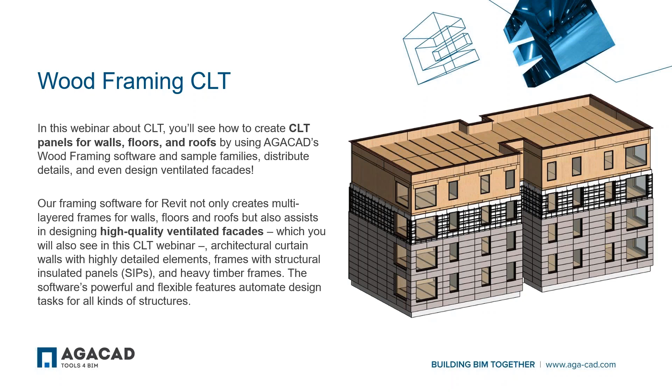Our framing software for Revit is not only for multi-layer timber frames, but it can also design high-quality ventilated facades, also architectural curtain walls, frames with structural insulated panels, and even heavy timber framing. So everything depends on the configuration and on the families that we're distributing. The software is really flexible.

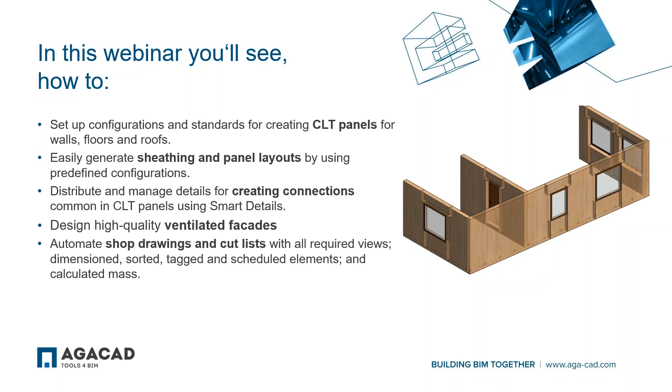So in this webinar, you'll see how to set up configurations and standards for creating CLT panels for walls, floors, and roofs, also easily generate sheathing and panel layouts, distribute and manage details for creating connections, also design high-quality ventilated facades, and automate shop drawings and cut lists.

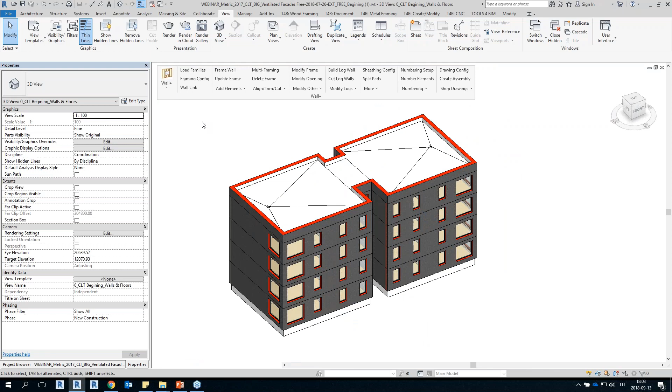And as you can see, this is just a simple project modeled with standard Revit walls, roofs and floors and windows and so on. So before using our software, we have to have a model created in Revit. Then, using our software, we load all the families or all the structural framing elements and structural connection elements to our project that will be used in designing CLT panels.

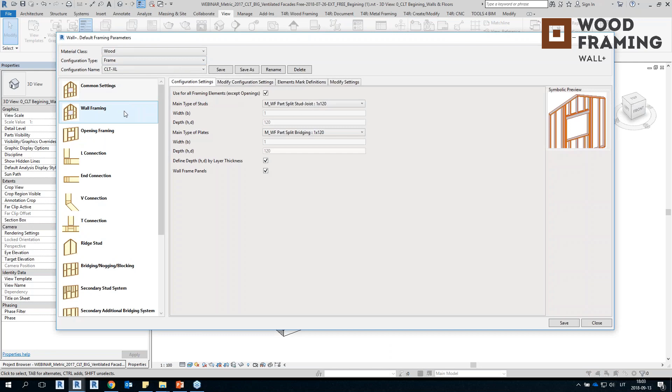And then we create configurations, so rules, how the elements are distributed into our walls. In these rules, we can predefine what kind of elements do we want to distribute, how openings are framed, how connections are framed, or how the parts are split.

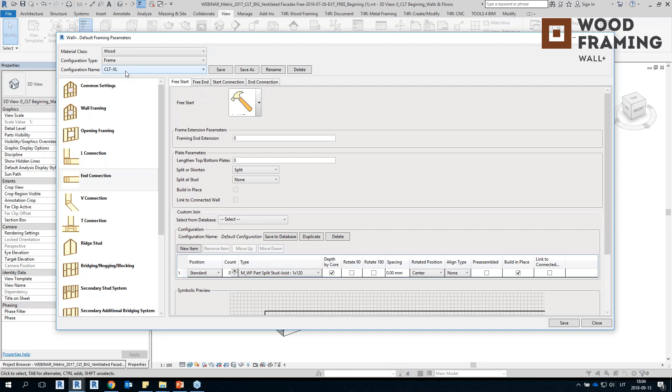And then we save these configurations using our own name so that later they can be used on future projects. They can even be saved on a shared location, like on your company's server, so all of your colleagues would have access to them, and all of them can use them. So, as I mentioned, they can be created only one time and then used in the future.

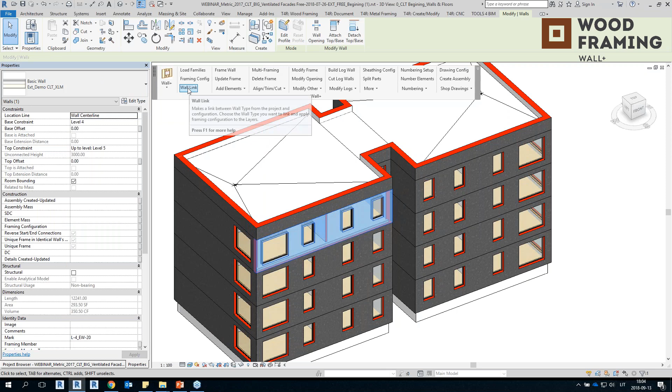And then when we create those configurations, we create a wall link. So, as I mentioned, this is just a simple wall created in Revit, and you can see that I have all these layers created. And now I have a window that is called a wall link. And when I open it, you can see that I have right here the wall structure that is created in Revit. So I have 6 layers, and to each of those layers, I can map a specific configuration.

So right now to the structure layer, I'm saying that I want to add the main frame, so the main CLT panel layer. This is the configuration that I created right here, and I mapped it. And also I can create configurations for the parts. So the CLT panels and the insulation on top of them, and then the facade panels on top of insulation. All of them will be created as parts in Revit. So you'll see that.

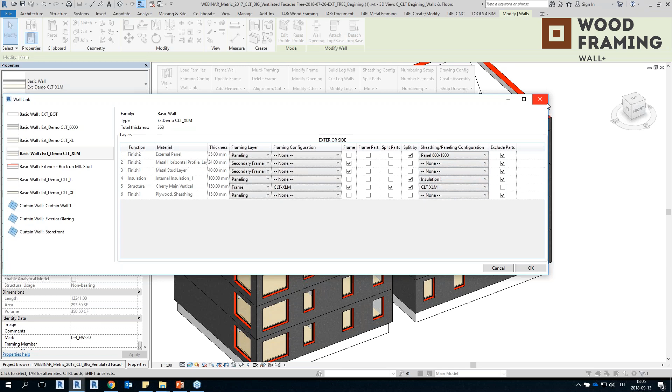Okay, and now I will open another view. And in this view, you can see that I've already generated CLT panels on half of the building. So you can see that on this part, I already have parts generated. So all of these CLT panels are created as parts, but I don't have them yet on this side of the building. So during the presentation, that is what you're going to see.

I will finish the building by creating CLT panels on this side of the building and on whole floors and roofs and so on. So right now, big CLT panels are generated on this side of the building, and on this one, I will generate them by different configurations so you could see some variety.

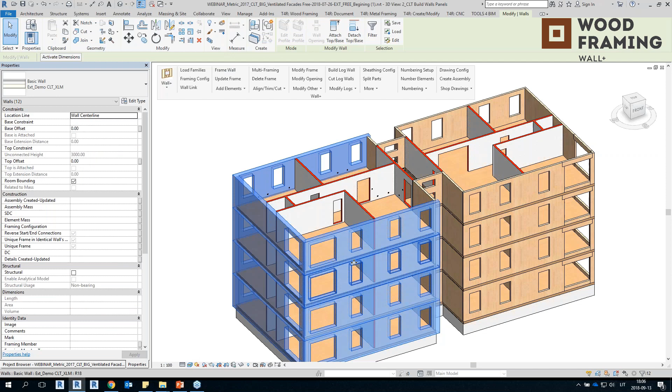So let's go ahead. I will select all of the walls in this view. I will click on frame wall, and now the tool is creating frames and parts for 12 walls in this project. So you can see that it's starting to work, and you can see instantly that CLT panels are much smaller. On this side of the building, as I mentioned, I'm using a different configuration.

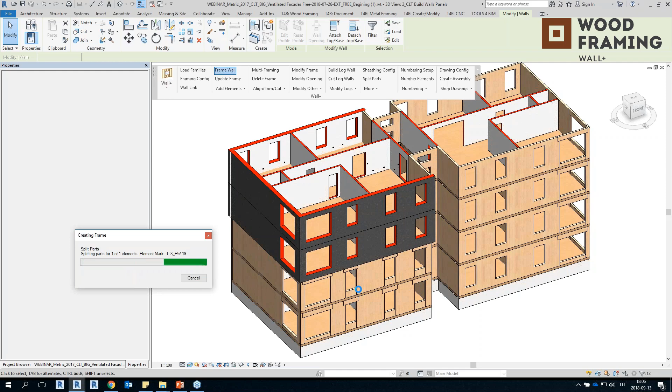And that's it. I already have the parts split, but of course the connections are still left, so we'll add connections later. And now I will open the Manage Walls window, because using this I can very easily select all interior walls.

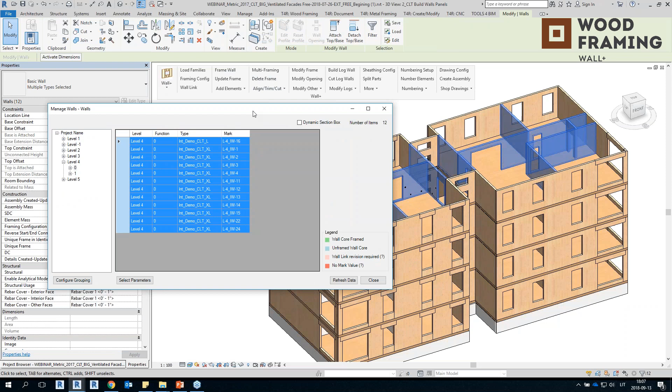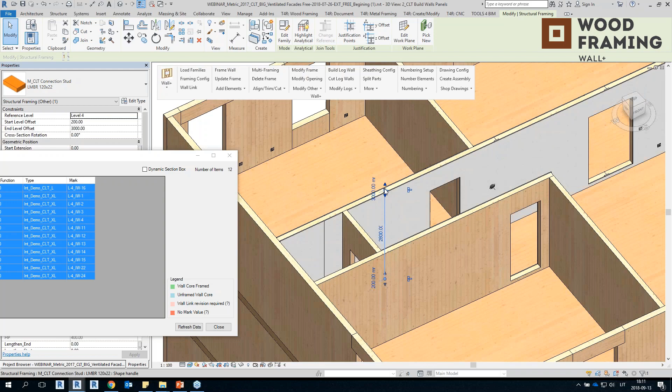You can see that I can filter them out like this for one floor, and then I can hit frame wall again like this, and this wall is created with the sheeting, and the connection is really detailed, as you can see straight away. Okay, and finally we can move on.

So I will open another view for the parapet, and I will select all of it and frame it again. So for the parapet, I turned on the insulation parts. What you can see in this view instantly is that for the side of the building that I finished before the webinar started, I have split the insulation parts, and I've not done that for this side of the building because I just want to save our time.

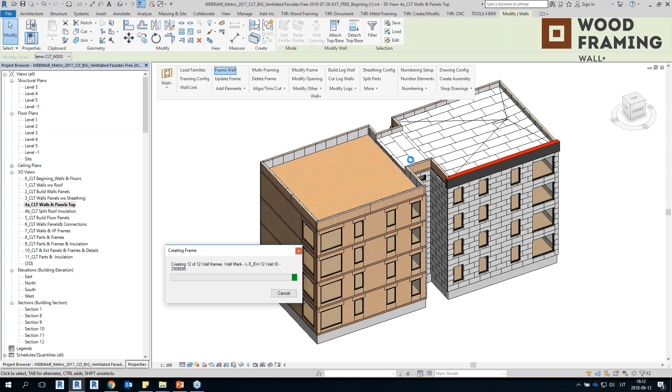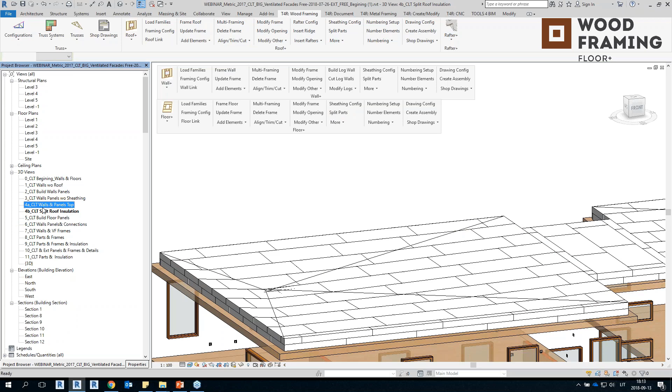But for the parapet, I also split the parts for the insulation as well. So the CLT panels are created every 6 meters, and also the insulation parts are split for the parapet. Yes, and you can see how nice it looks. And now I can go to the view, okay, and I can select it. And now what I'm going to do is I'm going to split the insulation parts for this roof. Okay, and it's done. So you can see that it's starting to come together.

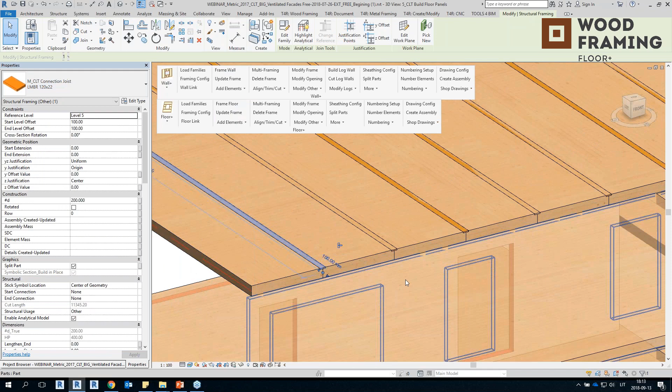And now I will move on to the floors. So with the floors, it's a little more interesting because we're going to modify the frame, and we're also going to check the multi-framing functionality. So I'm going to select this floor and I'm going to frame it. So the workflow is the same. We already have the floors created in Revit. Now we're framing it, and the tool added these connection joists, and it split the parts again for the CLT panels.

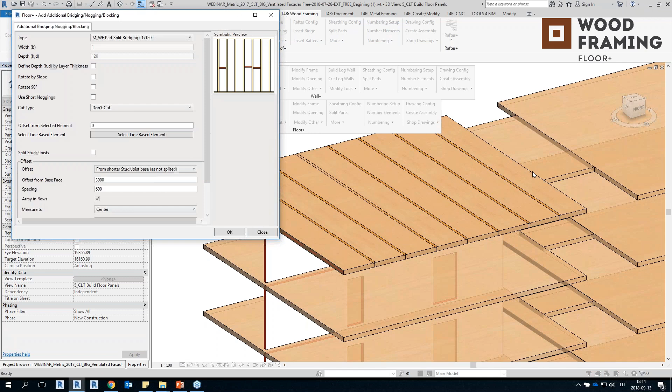But these panels are too long for me, so I want to add an additional element, a split above this wall right here. So this wall will act as a support. I'm gonna use the add additional elements functionality from the Floor Plus, and I'm gonna add an additional bridging between these invisible elements that were added in the configuration. I'm gonna split the joist with this element, and I'm gonna select the wall to act as a support. And that's it, and now the tool will add the additional element.

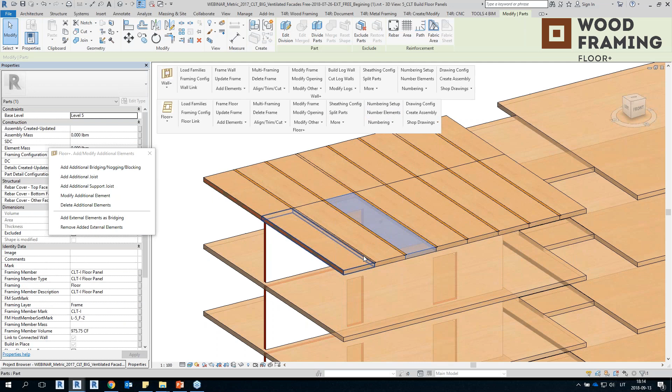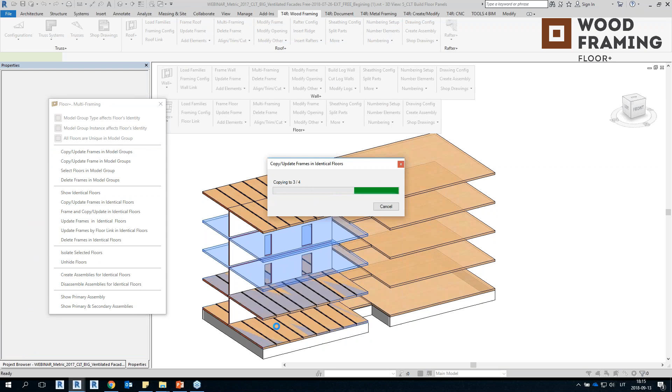And now I just have to click on split parts, select the element from the frame, and that's it. The parts are split and the frames are also split. And now I don't even have to do all of this workflow again for each floor because they are identical. So I'm going to open multi-framing, and I'm going to copy this frame with all CLT panels to all identical floors in my model. And that's it. So I won't have to modify each floor. I can just copy it like this. So it's pretty fast, as you can see.

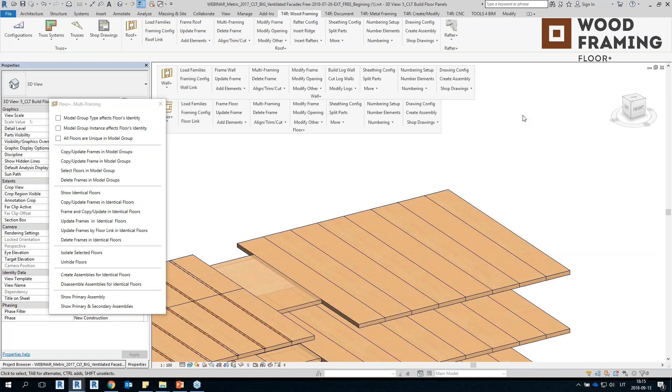And also what I can do is I can frame these floors, and they use a different configuration. So I'm gonna just use frame and copy. Yeah, and that's it. And now what's left is the details for this floor, but I will add them later so you'll see. And now you can also see the connection that is really detailed.

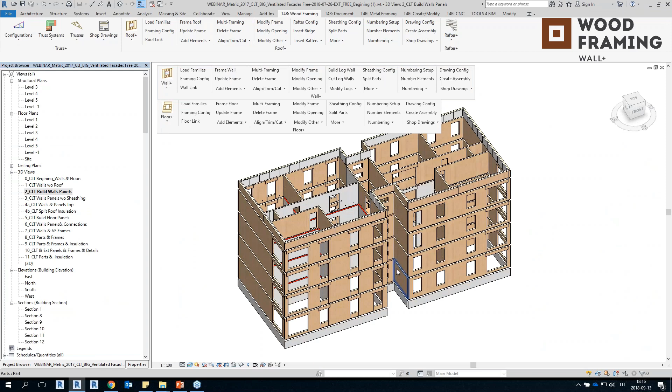Before I add the details, I have to number the parts, and the tool numbers them automatically. So I just need to use number parts and then number elements. So the tool is writing mark parameter values and values to other parameters that you choose to your elements and to your parts, to your structural framing elements and structural connection elements automatically.

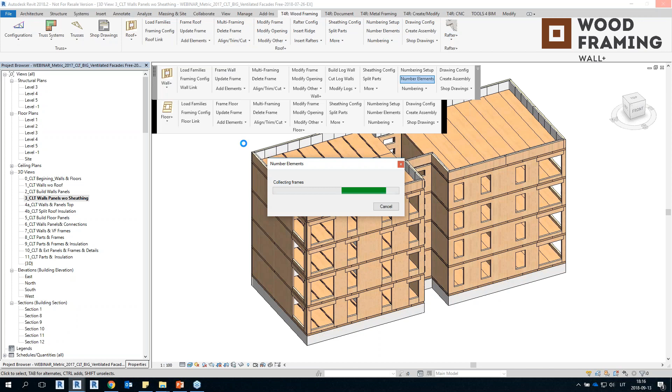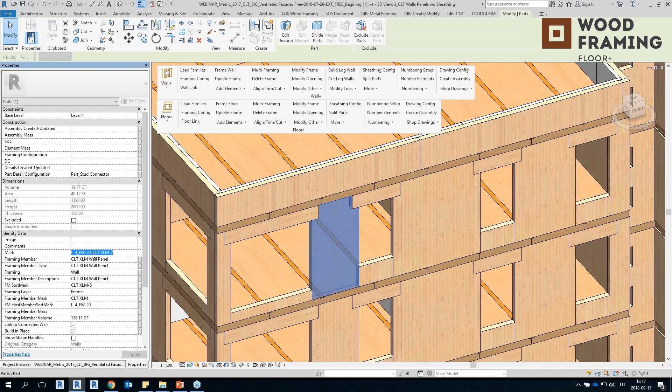Yes, so all of that is numbered, and I can do also the same for the floor parts. And now I can select the parts, so you could see that all of that is numbered automatically. And we will also see these values added in the shop drawings.

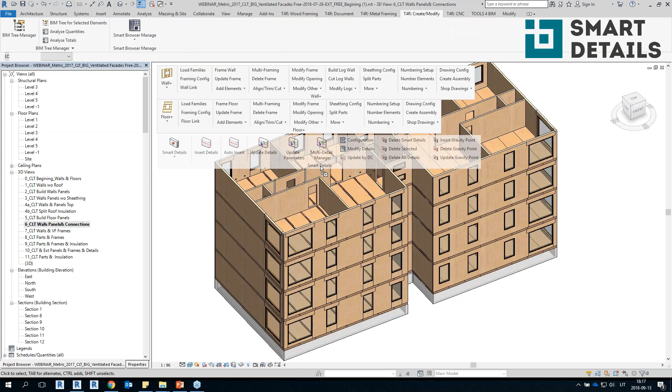So once I've numbered them, I will open another 3D view for connections, for adding details. And for this, I will take my Smart Details tool, another tool that I will use to add the details. So first of all, I will select all the headers in my model.

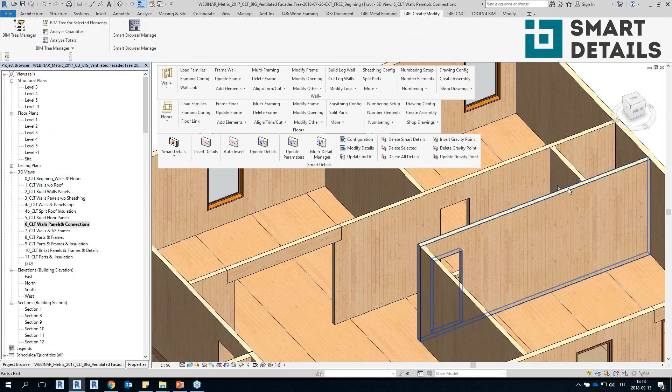And I will use Insert Details, Structural Framing, Header, Dovetails, Insert Details. So now the tool is inserting details automatically to 44 elements in my project. It's searching for the rules that I've added in the configuration and so on. And you can see that they're here. The details are added on all elements in my project, to all headers that I've selected.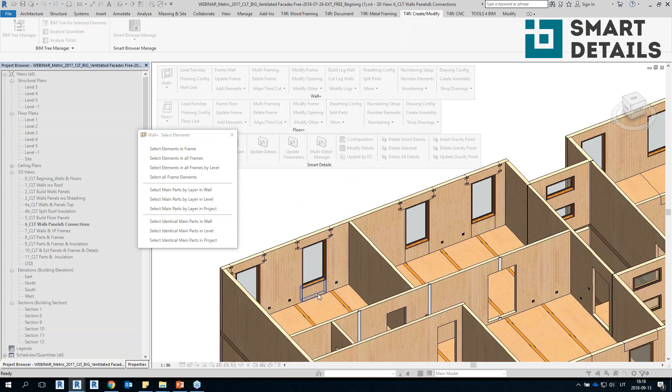And now what I'm gonna do is I'm gonna select the parts. So for that, I will open Select Elements menu and use Select Identical Main Parts in Project, let's say. Select this part. All identical parts are selected, as you can see, very quickly. And now again, I'm gonna use Insert Details, choose the CLT parts category and add dovetail assemblies. It's just an example with a dovetail, but any type of detail can be added.

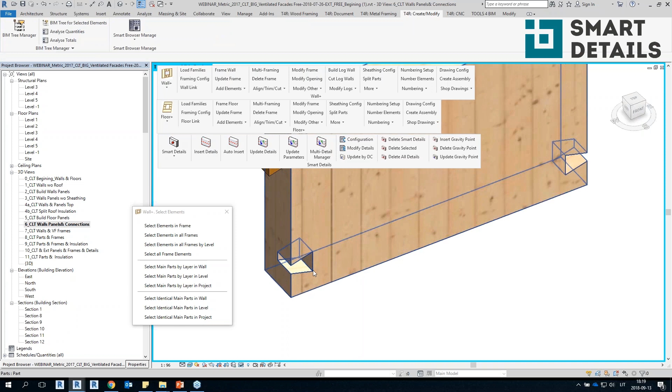So I will just isolate this part and this detail so you could see how accurate this is. Isolate element, and you can see that the cuts are added right here, and the structural connection detail is also added right here. So it looks really good in my opinion, this detail. Yeah, and it's added, it's distributed everywhere. So as I mentioned, any type of detail can be added.

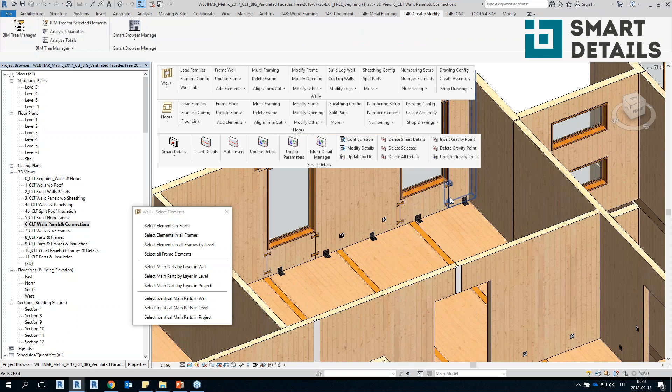So now I will select the main parts in level only. So not identical, but these ones. And again, I'm gonna insert details, choose the CLT parts and angles. Yes, and angles are distributed throughout the walls. I can also do the same for this side of the building, like this.

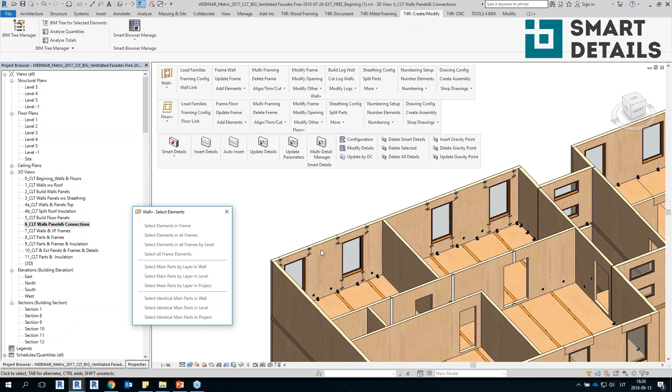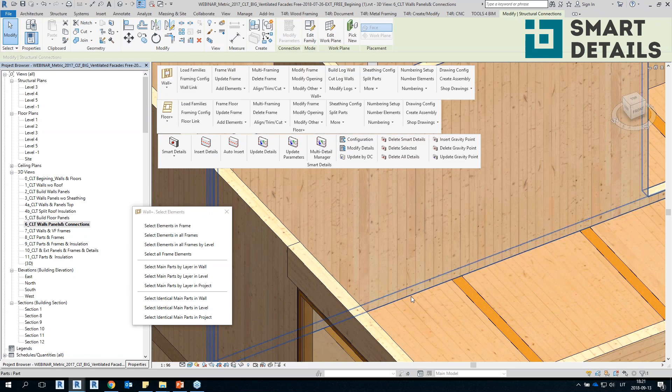And now what I can do is I can add connection dovetails. So I'm gonna select the main parts by layer in level. Yes, and I will insert the details to the connections. So connection dovetails, it added these details to the connections that it found. So this is a T connection, and we can see that this is an L connection, and also all of the details are added.

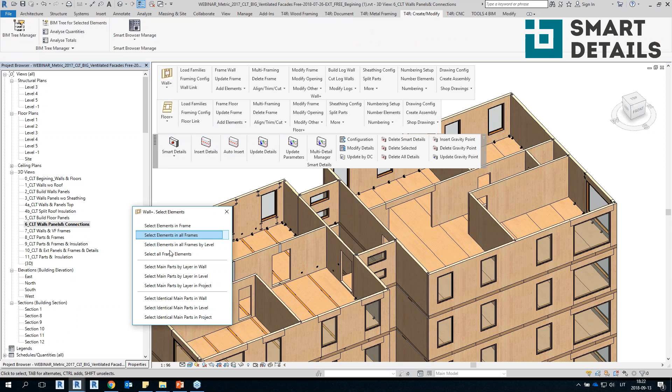And now I can select walls in the side of the building, and again add the connection dovetails. Yes, and finally the interior walls. Yes, and the final wall is left. This was a little different.

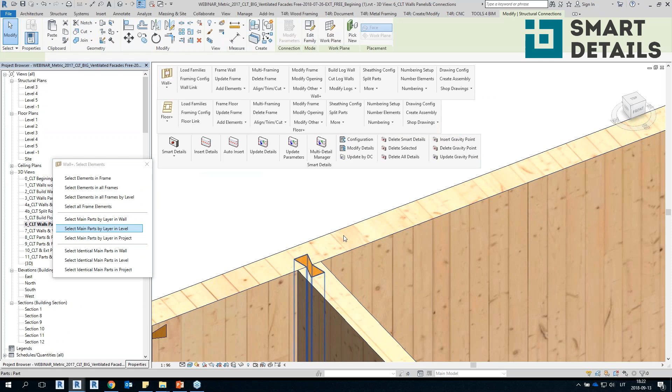Yes, and now that I've added all connection dovetails, for example, we can even isolate this wall again to see how it's added. Yes, so everything is really accurate. I will reset this view.

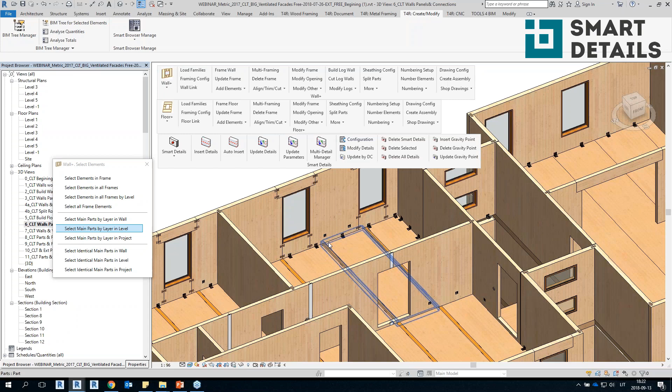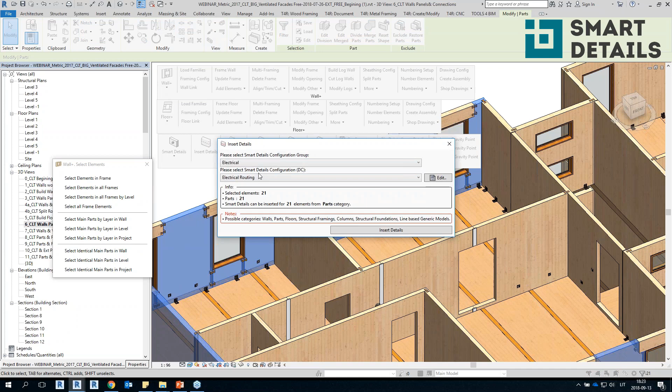And now let's add details for electrical fixtures. So you may notice already that I have electrical fixtures in my model, and I can add details even for these kind of elements. So I will again select these walls, insert the details, choose another group for electrical fixtures and electrical routing configuration. And that's it. You can see that Smart Details added a cut for these electrical fixture elements.

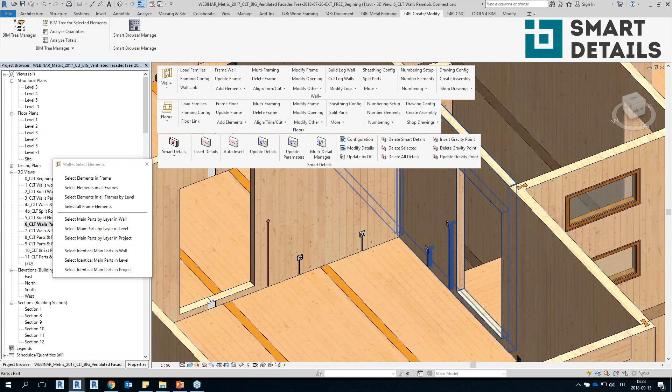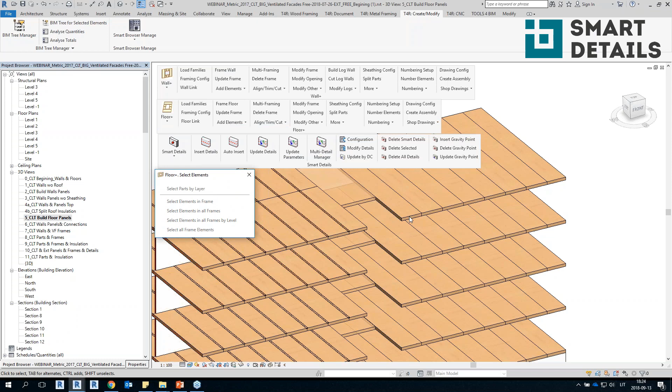We can also add these details in the interior walls. Okay, insert. Yeah, and that's it. And now I can go back to this 3D view created for the floors, and I can add details for this side of the building, for these floors. So I will open Select Elements menu of my floor tool, select parts by the layer. I will do this only for the top floor, and I will insert the details to this floor. I will choose CLT floor parts and CLT floor connection dovetails.

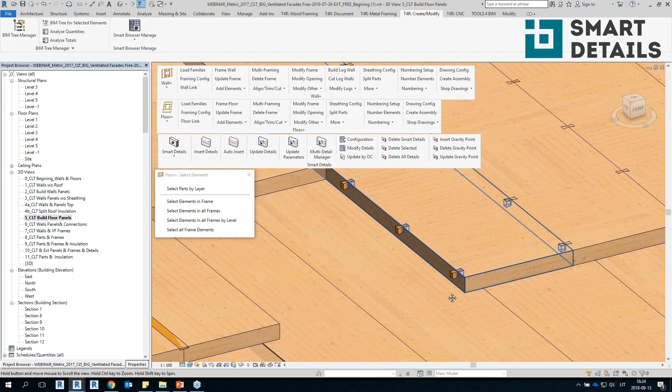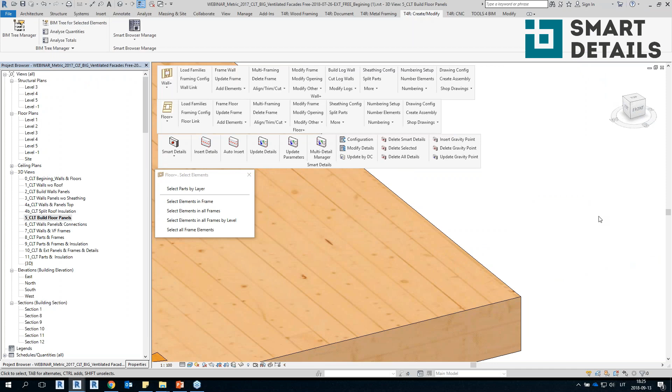That's correct. So as you can see, it looks really good, except for the side parts. So we can create different configurations for side, or I like to modify them. So we can just distribute them everywhere, and then we can remove them from where we don't need them anymore. Okay, I will again modify details. Now for this part, remove them from this side. Yeah, and that's correct.

I've finished splitting the parts for these panels, and now what I'm going to do is I'm going to show you a little bit of the ventilated facade, how to create metal elements on these CLT panels, and later I will create shop drawings.

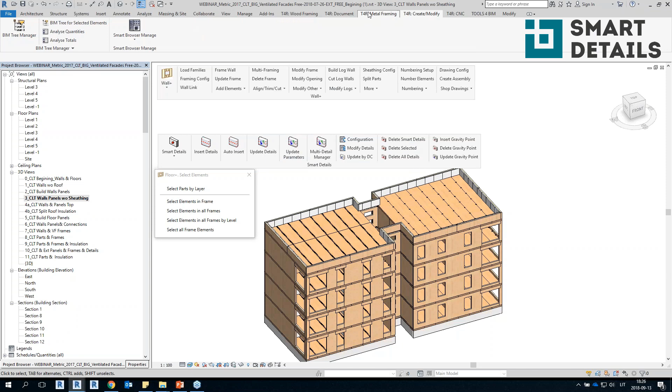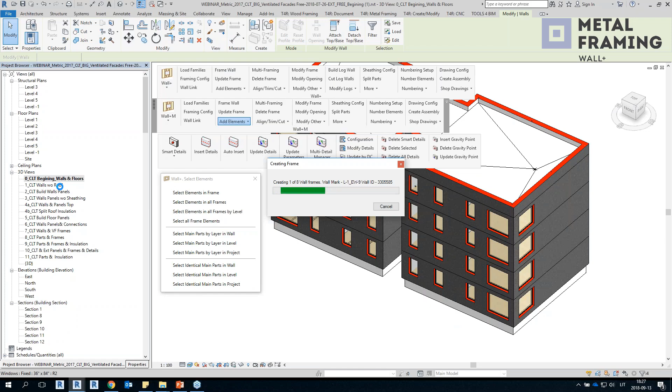So in order to do this, I will open Wall Framing Metal. As you can see, it looks pretty much the same, and the workflow is also the same. Yes, I will select these walls, and I will add the secondary frame. And you can see that these secondary frames for ventilated facades were just created.

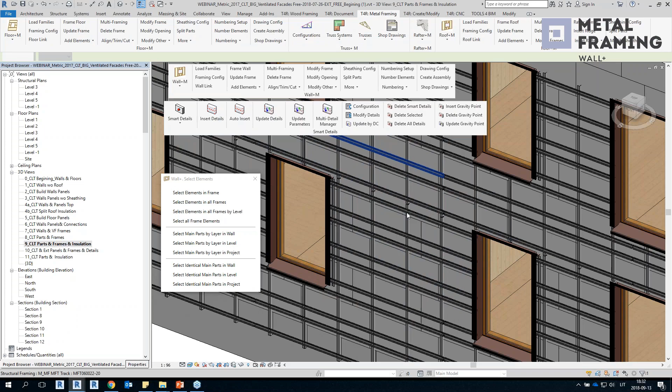So I will move these windows a little bit so you could see more. Yes, and for example, we can open CLT parts and insulation. So for this part of the building, I've created not only the CLT panels, but also the insulation parts on top of them. And now I'm adding metal elements for creating ventilated facades.

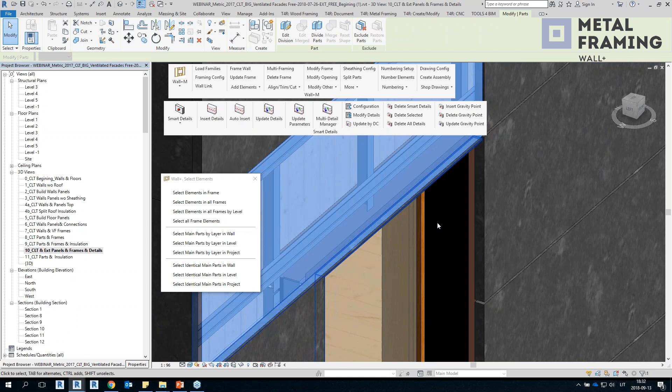And if I would open a view with the panels, you can see that the panels also are added, the facade panels are added on top of the metal frame elements, like this. So this is really accurate and very detailed. And the only thing that I'm missing right now are the details.

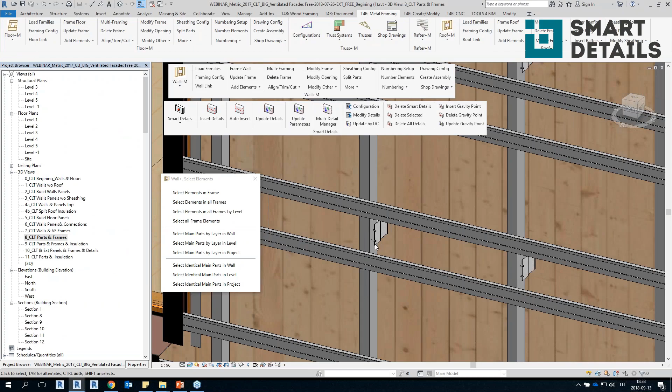So now I can select parts, select main parts by layer in level. Yeah, and I can insert the details automatically because the configuration is entered into the parts. So we can enter the configuration for all parts in our project, and then we don't have to insert details, then select configuration and so on. We can just choose auto insert. The tool reads the configuration from the part, and that's it. The details are here. These complex details were just added automatically on the whole frame.

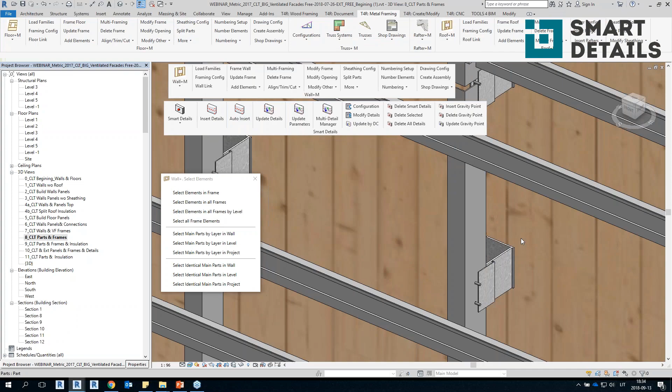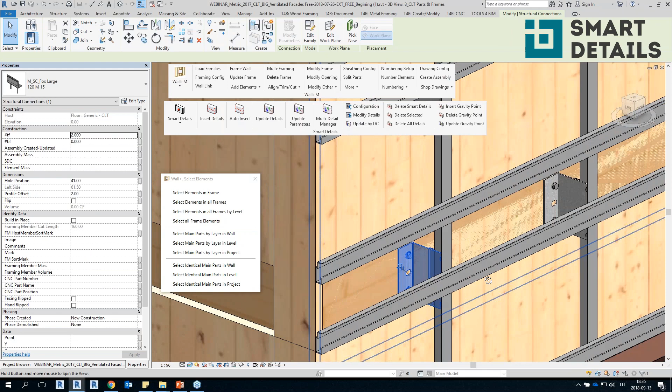Yes, I can do the same for this floor. Auto insert. Yeah, and now I want to add bigger and stronger details to the floor. Yes, that's it. So you can see how powerful the Smart Details tool is. It just added all of these complex details automatically.

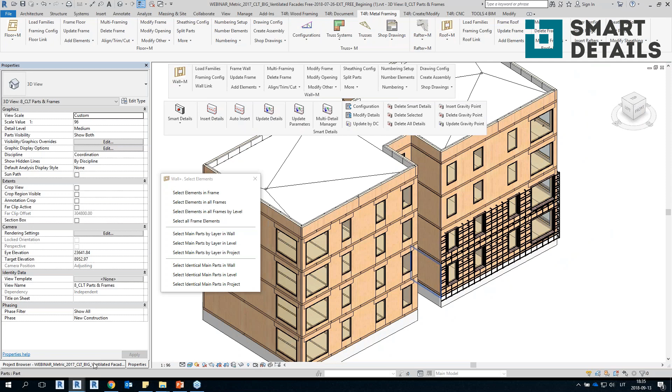I can isolate them so you would see how complex they are. So you can just download these details from the manufacturer's page, or you can create them yourself. And with our tool, you can just distribute them. I will reset the view and show you the final result. And that's it. So CLT panels, ventilated facade, the details, and all of that is created really, really quickly and automatically. The best part, that it's all automated.

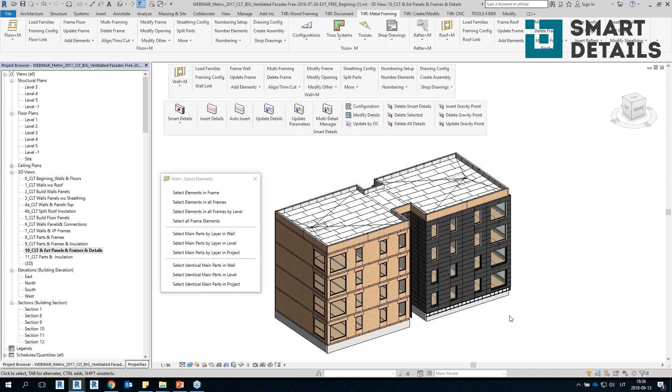Let's create an assembly so you'll see all the shop drawings and cut lists generated automatically. So now I will just click on create frame, create assembly, select any element from my wall. So let's take a look. The 3D view is here, then the CLT front view is here. So as you remember, we numbered all of the parts automatically, so these are the numbers.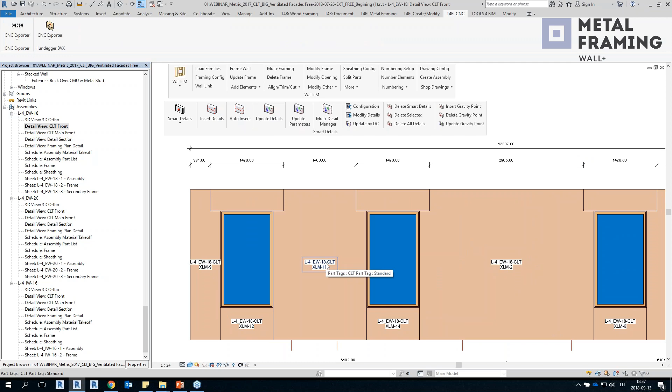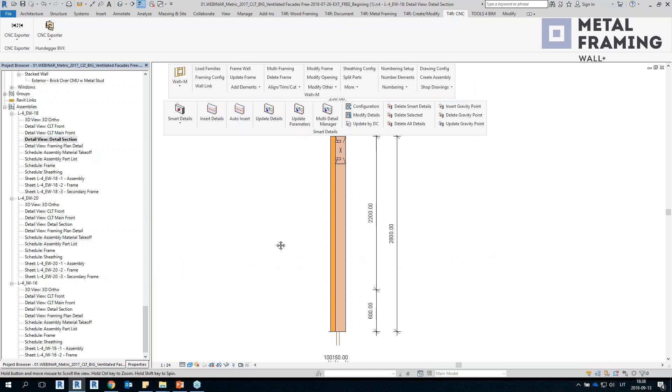Then we have the headers, and maybe I will open the main front view where we can also see all of the details added, and all of the measurements are added automatically. Everything is measured by the configuration, so you can create your own rules how the elements are measured. We can take a look at the section view, the material takeoff, where all elements are calculated, the connections, the headers, the CLT panels, and the part list is also here with the framing number mass calculated.

And the frame schedule with the headers. And we had no sheeting, so that's why this is empty. Yeah, and that's it, I believe. Now we can compose the sheets and create all other views for other assemblies. So okay, don't run away yet.